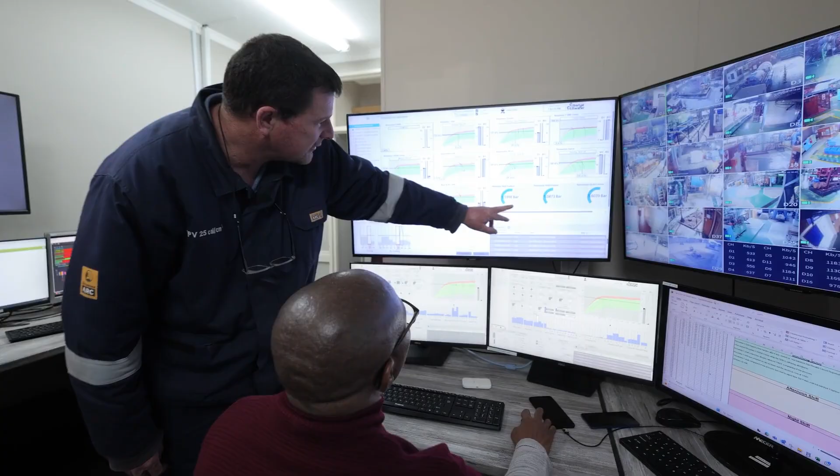My name is Johan Lowe. I work as a technical specialist at Sibanye-Stillwater. I'm part of the group technical team. Here at Sibanye, we believe in digital as a form of operational performance. So originally Ignition was implemented to replace the legacy SCADAs, but Ignition is much more than that. It's a true platform of which a SCADA only forms a small part, and the rest of the platform is just possibilities.

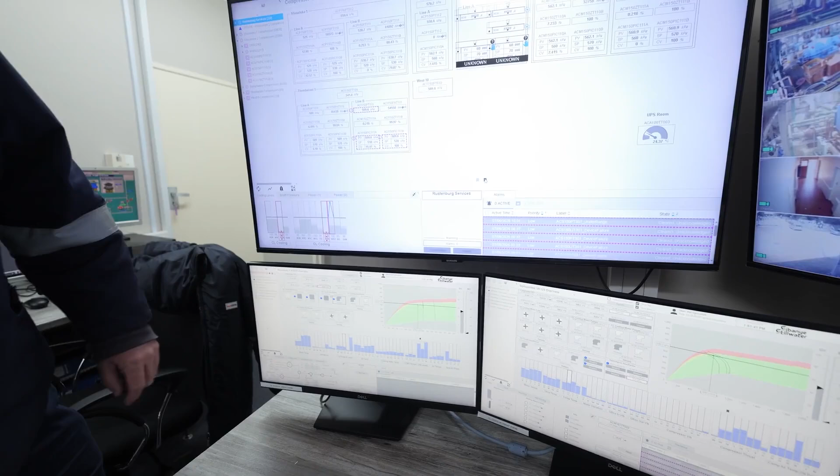The key requirement is that we should implement an operational technology that is a workable solution to integrate various products and requirements from our operational teams, from SAP ERP systems all the way to lab information management systems. The customization with Ignition made it easy for Concera to understand our requirement and the need for this project.

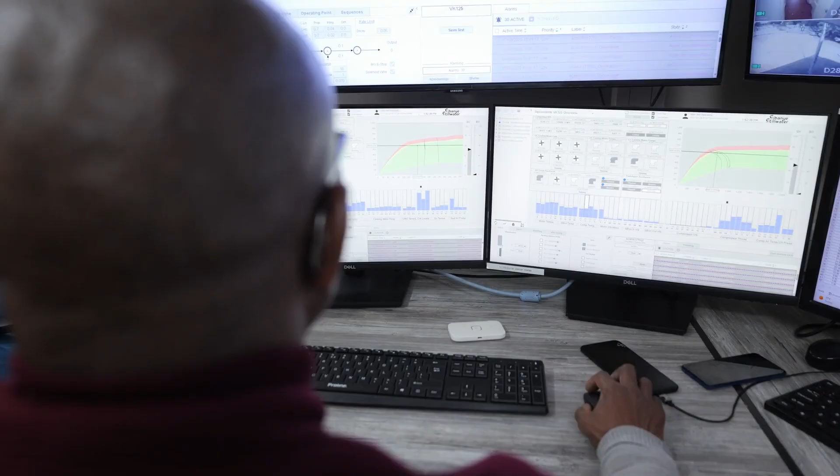I'm Rolf Boshoff. I'm the co-founder, director and engineer at Concera. I believe I'm the first true believer in the company who believes in Ignition and what it can offer. Sibanye required a distributed control system, basically the visualization for their current PLCs on site. These operations included 4 shafts and 10 compressors.

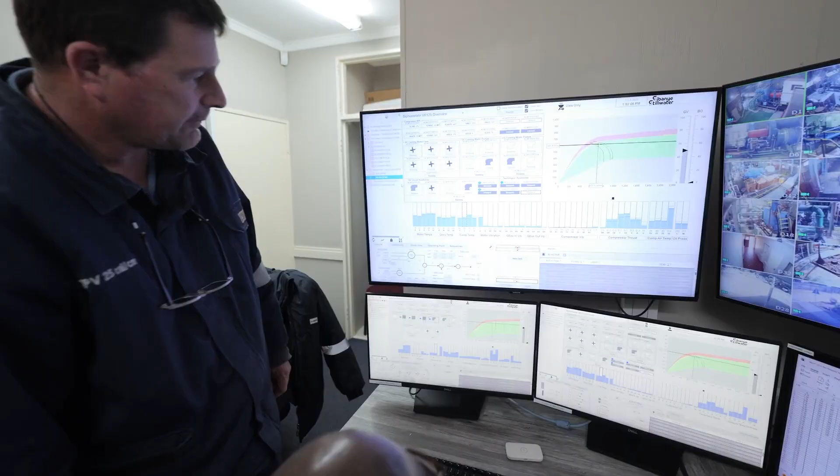We wanted to create a system that's not only easy for the operator to use, but is easily used by maintenance teams to expand the system and maintain it and make their life easier as well. It must be a simple system that is easily understandable and simply implementable, to also be in line with our PLC coding standards without hindering our current operational systems.

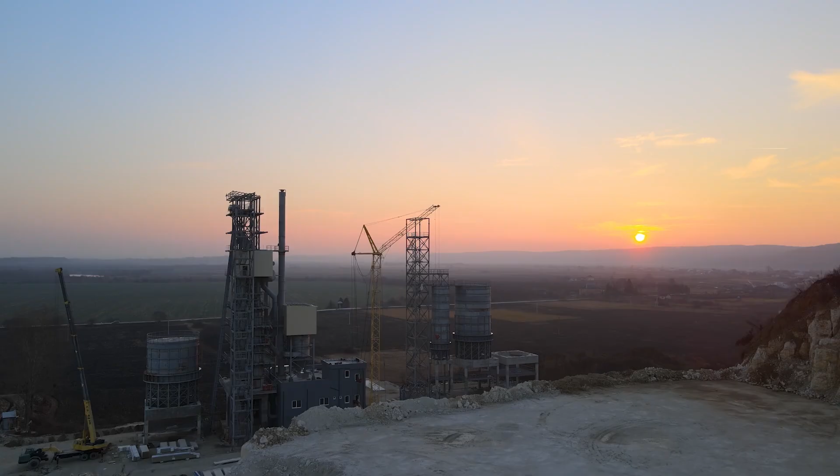Where we initially estimated 4 to 6 months to create the full project, we were asked to do it within 8 to 10 weeks. We were able to build tools and standards to use in such a way that we can deliver on that promise and deliver FAT-tested software by the due date. Ignition provides a flexible OT platform where we can use multiple elements like flexible data structures to Python coding to build elements that we can easily reuse and auto-populate data where required.

Another feature was UDTs, which enables the creation of PLC standards or customized standards, and that actually fitted exactly with our PLCs. With this system you can actually roll out hundreds of thousands of tags in a very short period up to a standard, and it's of good quality. We had 3 different PLC standards that we had to cater for on site. We built templates that could easily be modified and utilized no matter the tag structure in the PLC, and that made our development process that much quicker.

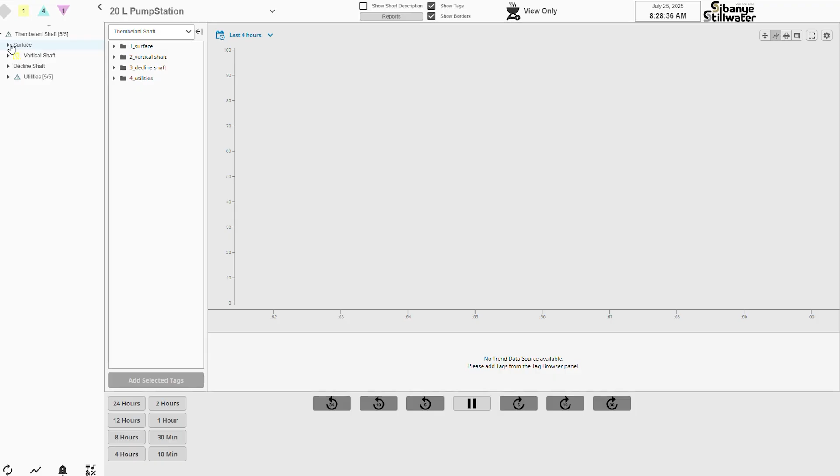The flexibility and versatility that Ignition and Perspective offers through their Python scripting and versatile data structures allowed us to create sophisticated visuals. One of these visual elements is the compressor surge curve, which visualizes the proprietary compressor control utilized within the compressor PLCs. This control is essential to the operation of the compressors to make it work effectively and efficiently.

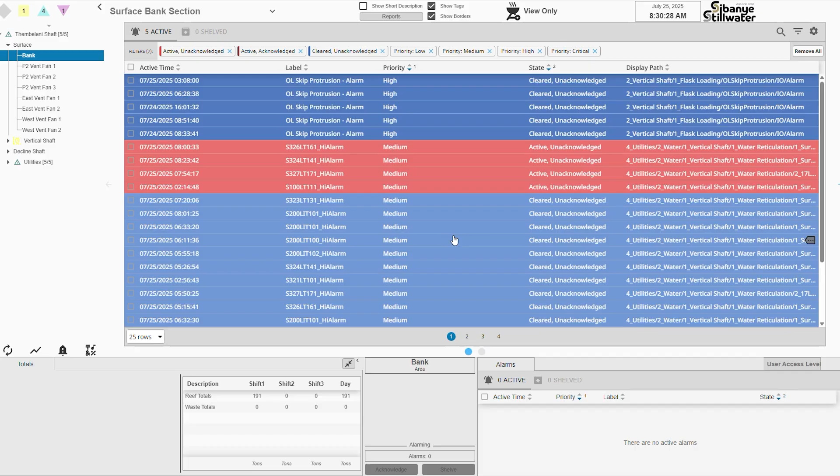The Sibanye implementation of Ignition was originally used for visualization, but since then it's expanded to a proper OT platform. We're using Ignition more as data collection, distributing that data to relevant parties, and not just in visualization, but also in forms of reporting and dashboarding. In the end, the project required the use of about 500,000 PLC tags. It had 160 displays or separate views for visualization. We historized about 7,000 tags and could generate up to 12,000 alarms on the system.

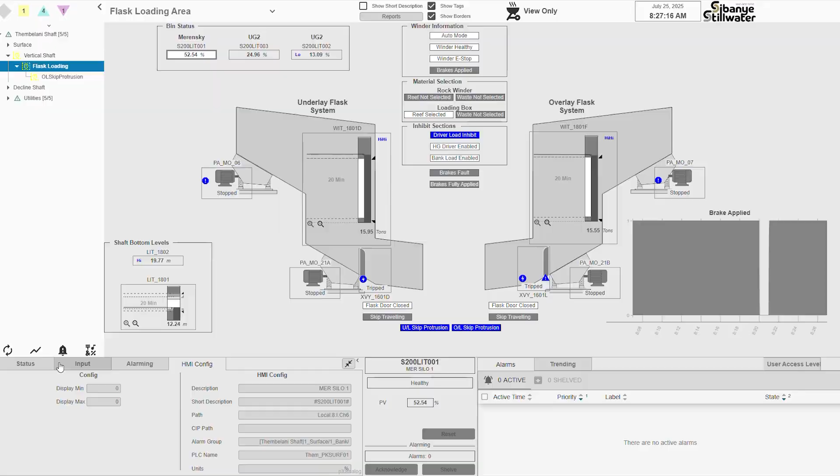We had to embrace the ASM or Abnormal Situation Management standards. It's often referred to as the grayscale SCADA, and then color is used to do the highlight. The SCADA basically uses the color to empower the operator to do his work more efficiently, and you can control what he needs to focus on. The Abnormal Situation Management Standard has very specific requirements. Firstly, the use of a navigation tree. Secondly, not using any pop-ups, not obscuring the view of the SCADA for the operator at any time.

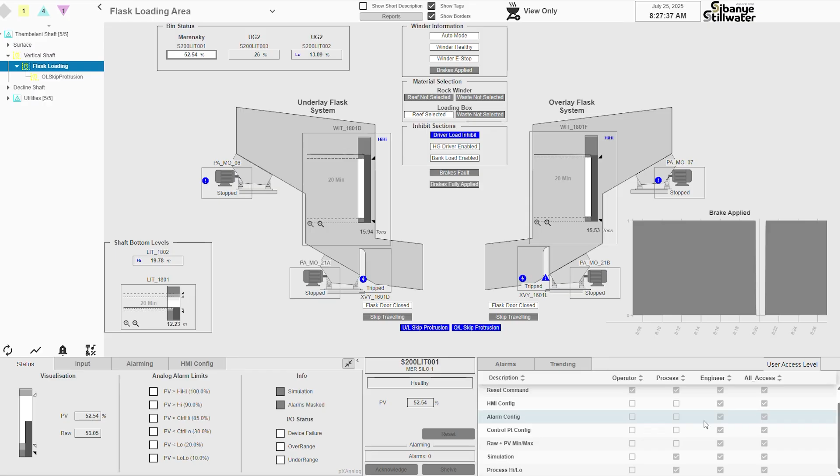We utilize the tag provider as our central repository of data, enabling security, alarming, and navigation information into one repository. It auto-generates the tree. We are able to specify which views open up based on what element you click on, which faceplates are opened. It goes as far as setting security up to instance level.

We further use the tree element to ensure navigation happens in a standard manner. The auto-generated navigation tree allowed us to make navigation predictable and simple. Concera customized the tree view to the point where we could lead the operator, like with breadcrumbs, through the tree view up to the point of abnormal conditions.

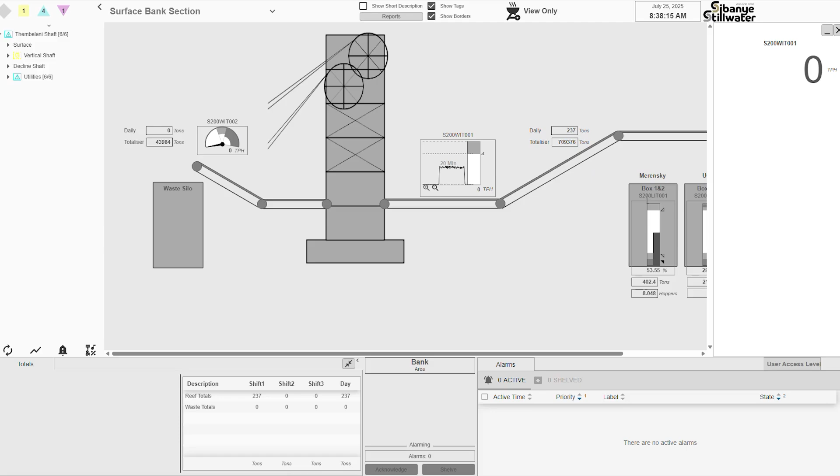We introduced a lot of quality of life features, for example docking certain analog or PV values on the right side of the screen that's always visible no matter what page you are viewing. We implemented search algorithms on the tree so you can filter on certain text or areas. We even allowed forward and backwards navigation on pages, so if you don't want to click on the tree, you just go back to the previous page or previous faceplate. We brought in a lot of quality of life features that made the system more usable.

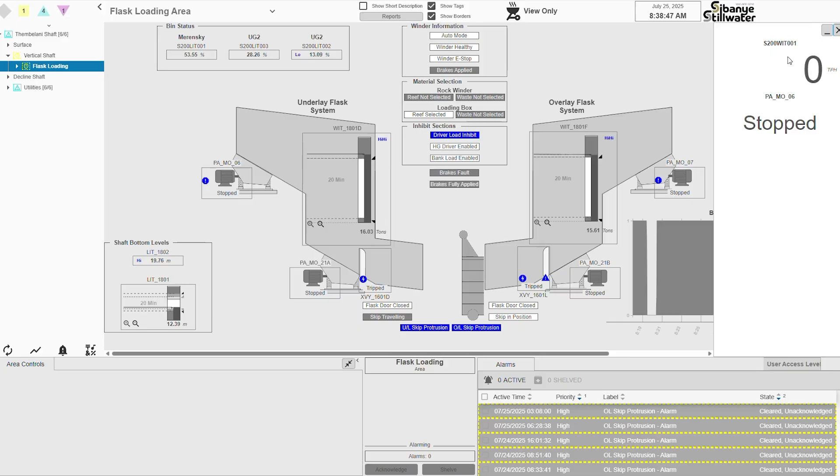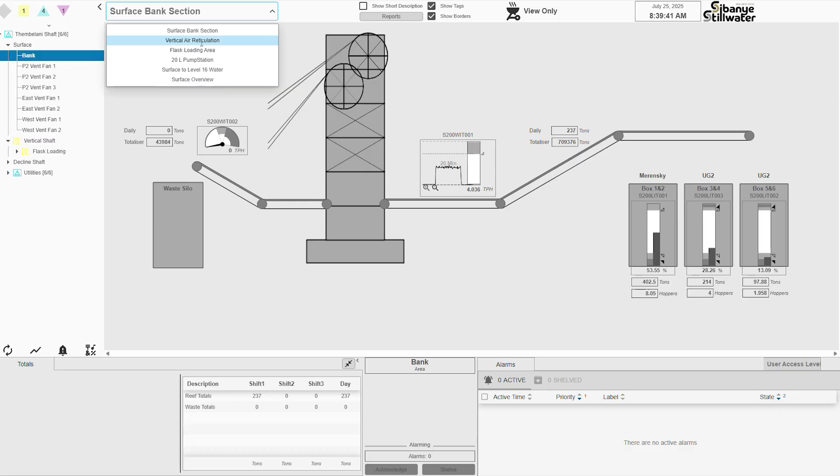Another big feature was EAM, which enabled us to implement our architecture solution in an enterprise style. We utilized the Enterprise Administration Module and project inheritance to ensure that standards were driven within these disparate systems. With the use of a hub and spoke model, we were able to create a central repository of standards that we could then distribute to all the relevant gateways on the network.

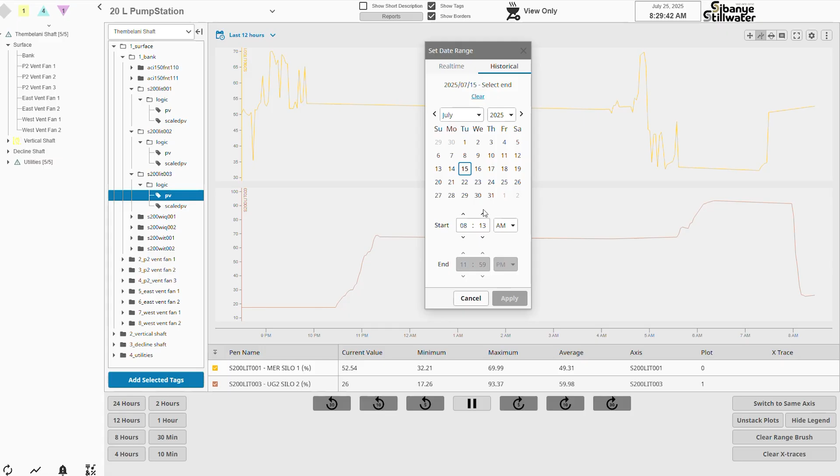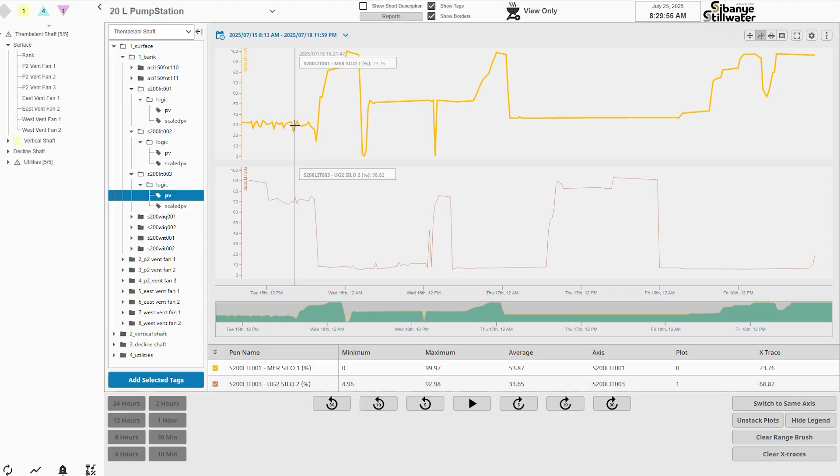We used EAM as a way of managing standards and distributing projects to different servers. We used Historian to store data for analytics and fault finding, and ultimately also used MQTT to distribute data to the Canary Historian for production data storage. We then used the hub also as a main visualization server with unlimited views for Ignition, where anyone on the IT network could get access to the visuals.

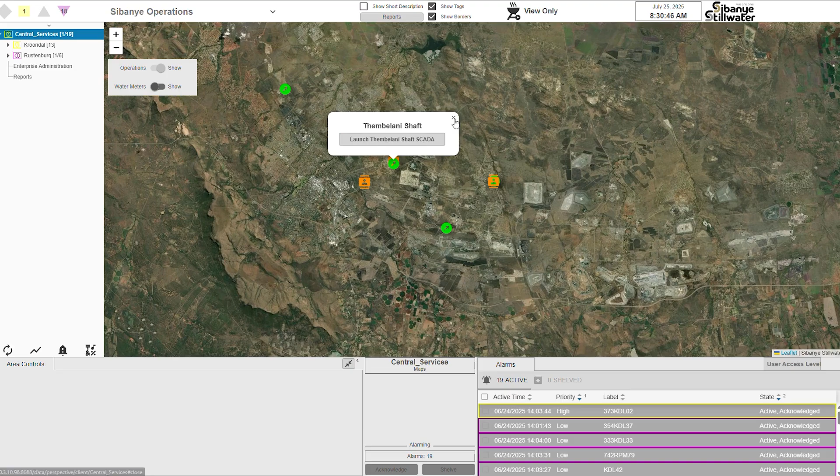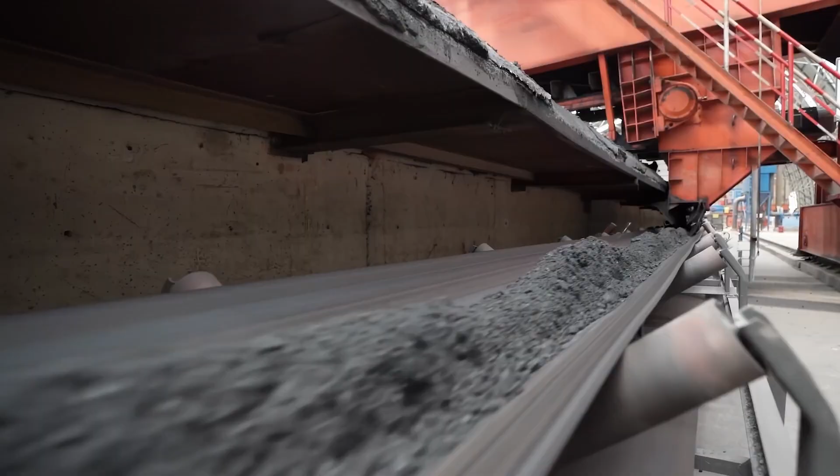The unexpected benefit of Ignition to me was the data buffering during network loss or network outages. We had quite a few challenges with compressors being in remote locations. Whenever we had network outages, that actually affected the central control room not having visibility, and we couldn't historize what's happening on the compressor machines locally. That has been solved by Ignition through the local edge gateway servers. In fact, you can recover from a major disaster in half an hour - we could reload a complete system.

Ignition currently is the solution that is technologically up to date and is the perfect platform to take you into the future. Our legacy systems were vulnerable to cyber threats and had already reached near end of life, which made it difficult to improve and implement, as well as comply with international standards.

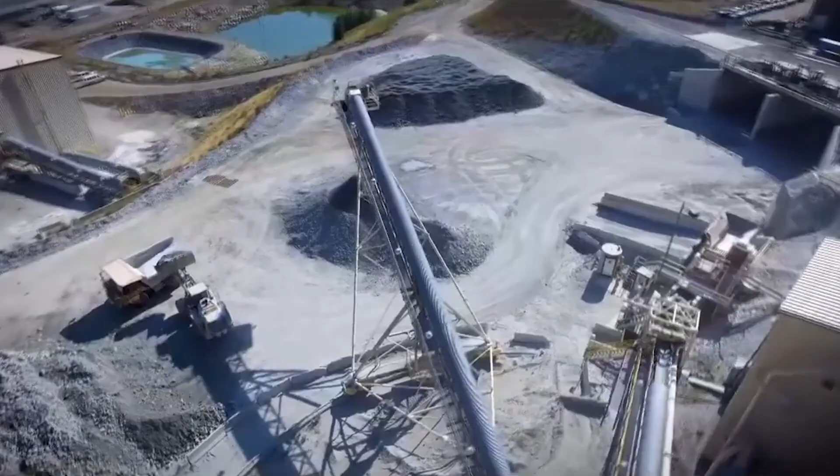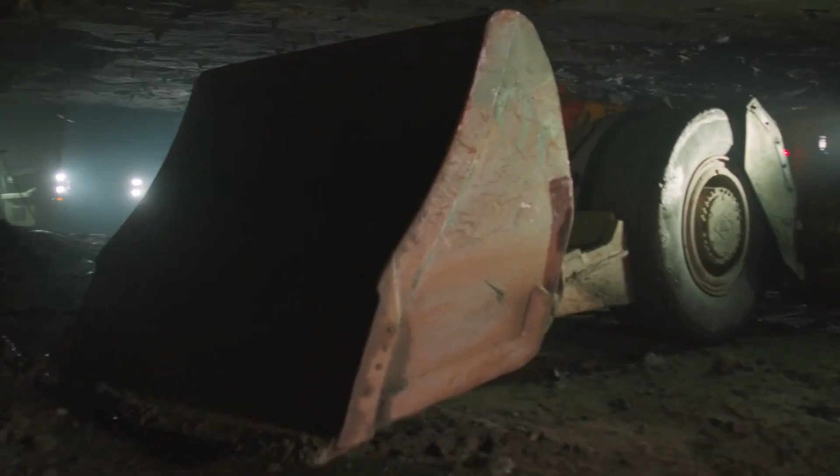On the Sibanye project, we followed security best practices like using Active Directory authentication for user authentication, and using roles to provide access on certain elements within the visualization. Those elements could be locked down up to instance level, so we allowed for flexibility and made sure that the operator has the right access when required.

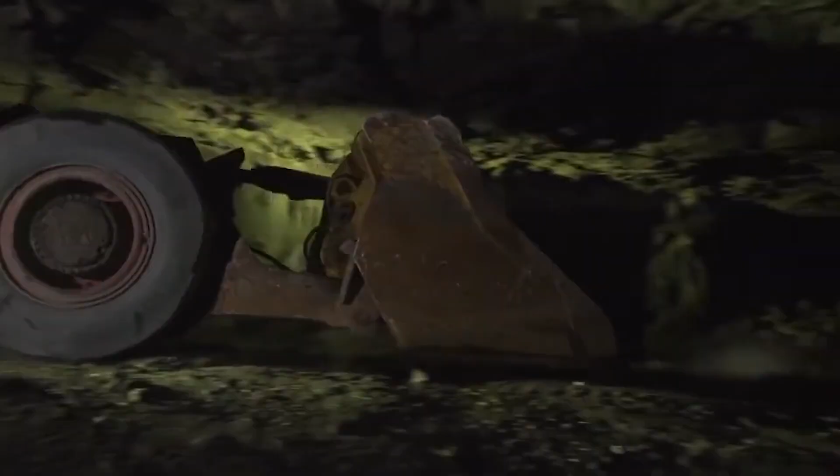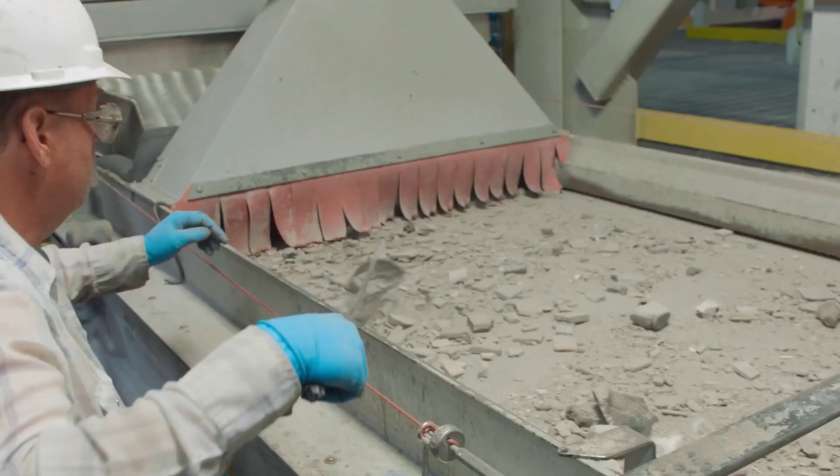We limited the ports to the IT domain based on what is required. In the end, only two ports were required to be opened, which makes the system very secure. SSL certificates were enabled on all IT infrastructure. It's actually much more secure than our legacy system and very much customizable to our requirements.

We keep on discovering new features as we keep using the product. One of the big outcomes that I'm quite excited about is the web-based technology - we could basically bring information, SCADAs, whatever we needed, to the decision makers.

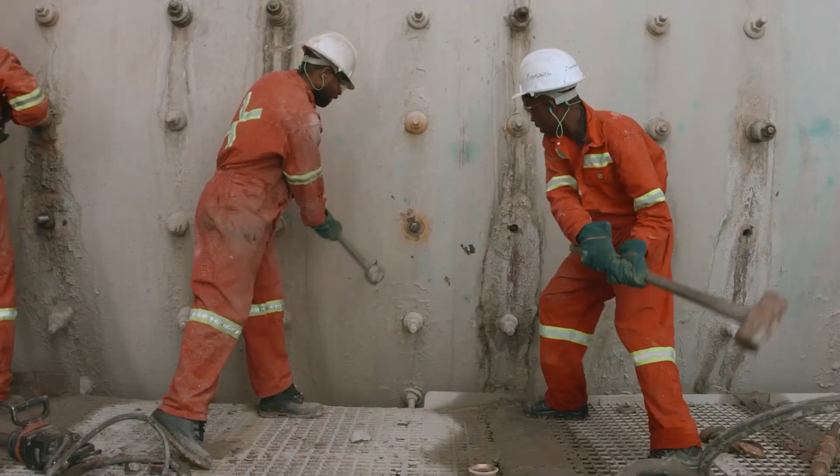The cost of implementation was probably less than what we currently pay in support costs. Taking this forward, the cost saving would become more exponential. One of the key features of the product was the long-term cost of ownership, especially with the perpetual license, including your dual redundancy license at a 50% rate in some of our operational areas where uptime is key in mission-critical systems. Ignition is lightweight and not resource intense, and the engineering cycles are quicker.

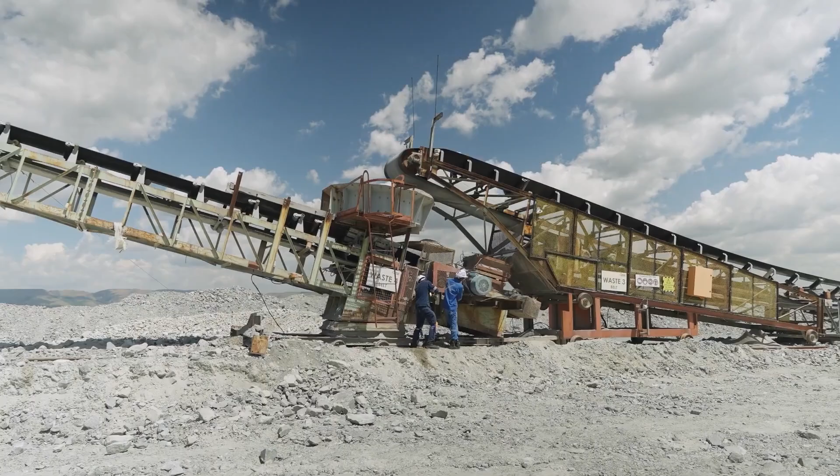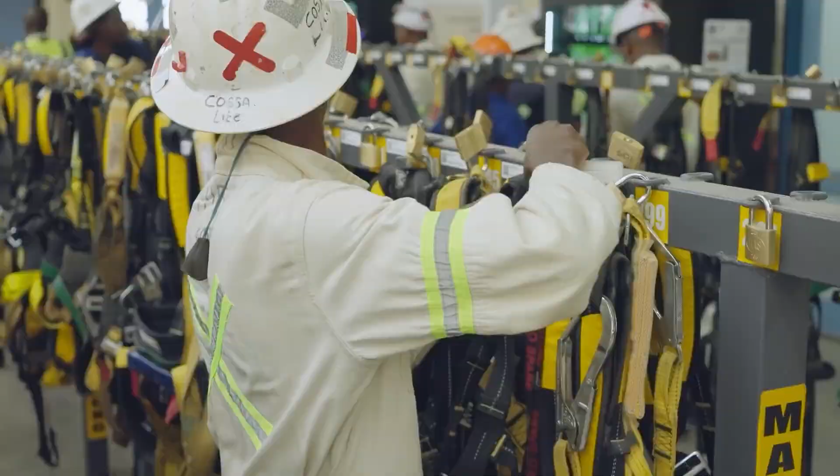You don't need specialized teams to support Ignition. We are also starting to introduce equipment monitoring systems for moving machinery, which needs to report specific information to our operational teams within our control rooms as well as our maintenance teams. The capability of having immediate view once we've initialized a change basically ensures we've got an improvement in our engineering efficiency.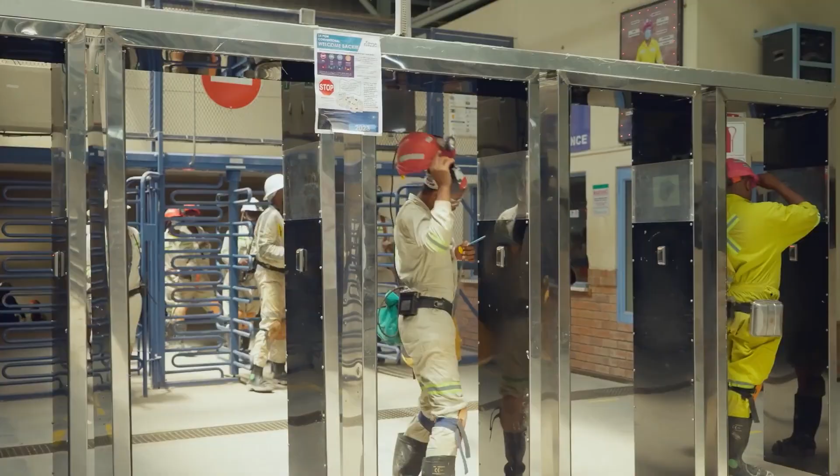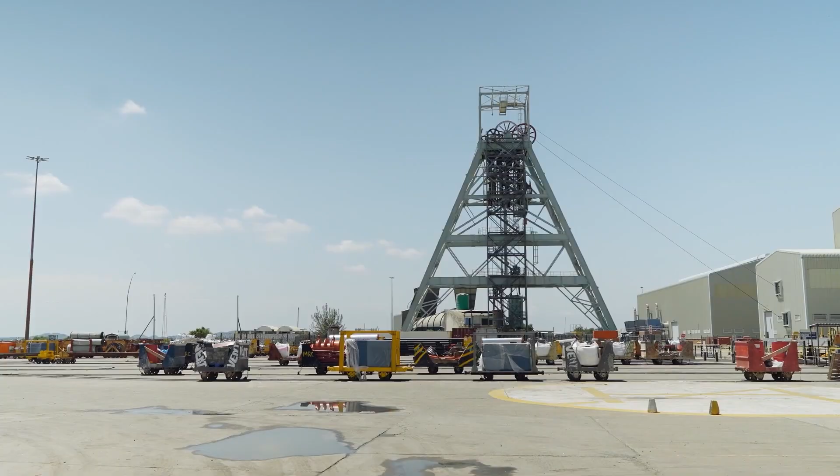Concera was not only a vendor to us, but a partner. Their expertise and knowledge of the system made life very easy. It has been an amazing journey, an amazing project. It actually shows how much more we can do with the solution that we have.

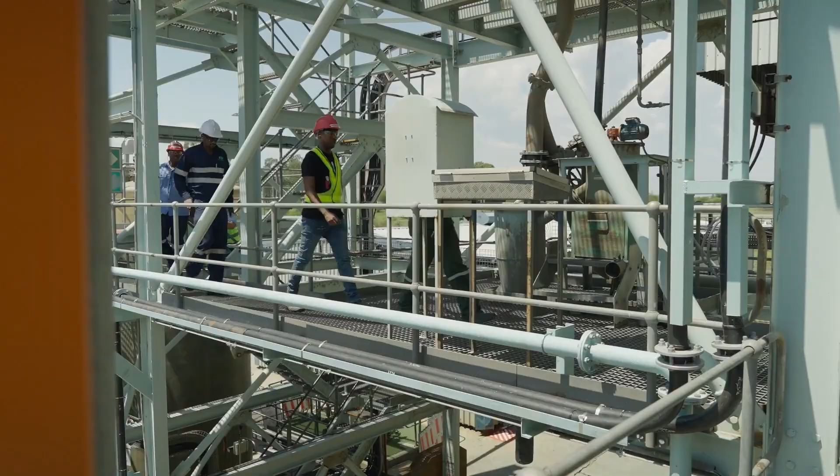In the past, we used to spend a lot of time fault finding the product and not the solution, and I think that is time wasted. With this new Ignition platform, I think if you can dream it, you can build it.